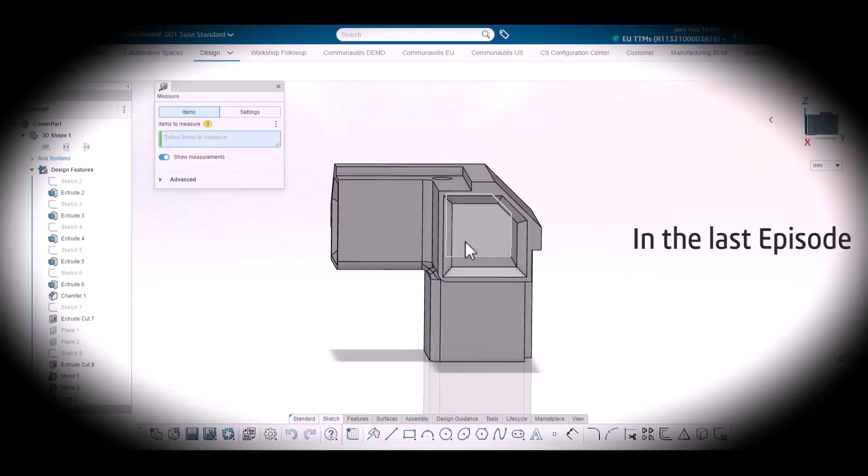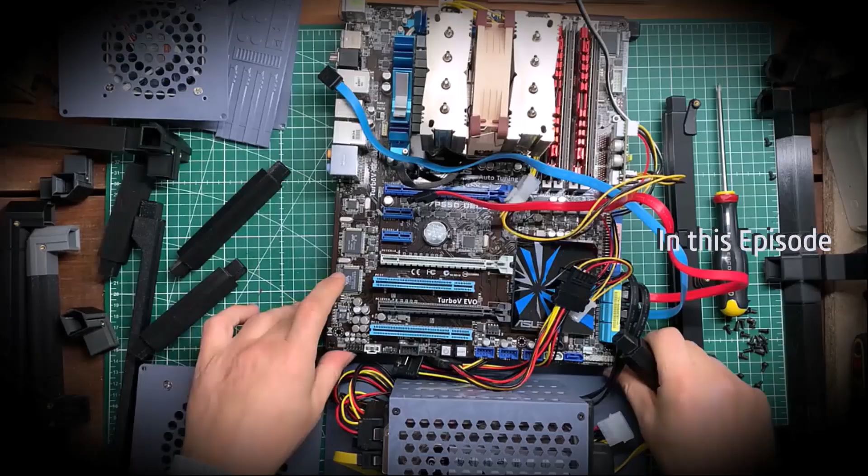In this series, we're transforming standard PC components into a fully functional network-attached storage with a 3D printed case. Don't worry if you've missed previous episodes, links are in the description below. In the last episode, we started solving some issues from the first NAS prototype, and there were some important ones. This episode is all about resolving the last issues, printing the revised components, and completing the assembly. I will also install the NAS operating system and a module to watch movies.

First, I assemble all the parts I changed in the last episode. We changed the whole structure, so I almost restart the assembly from scratch with motherboard bolted to back structure, and all corners and bars assembled. With the space I added in the last episode, they fit nicely together.

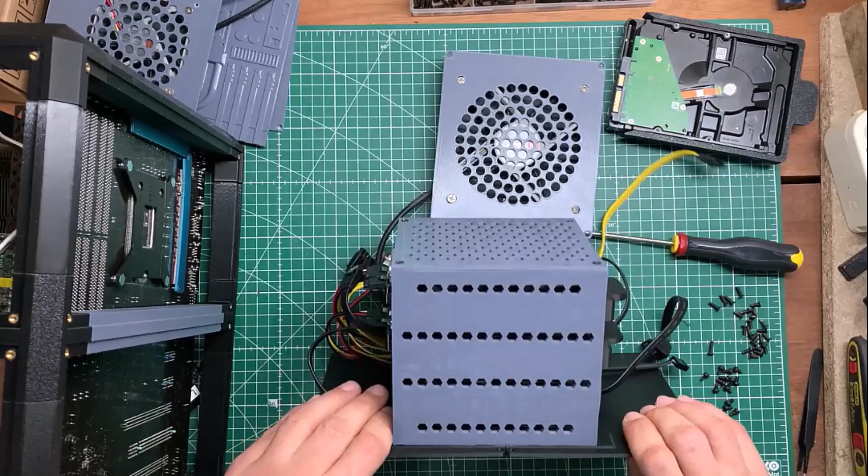When I take care of the hard drive box with the new stronger bottom plate, I also make sure cables are placed so they can be plugged correctly. This is not real cable management, but it is useful so the computer works. For example, the back fan cable needs to run under hard drives or the fan plug won't be accessible on the motherboard. I also plug hard drives on the motherboard because a NAS without hard drives is just a box with lights.

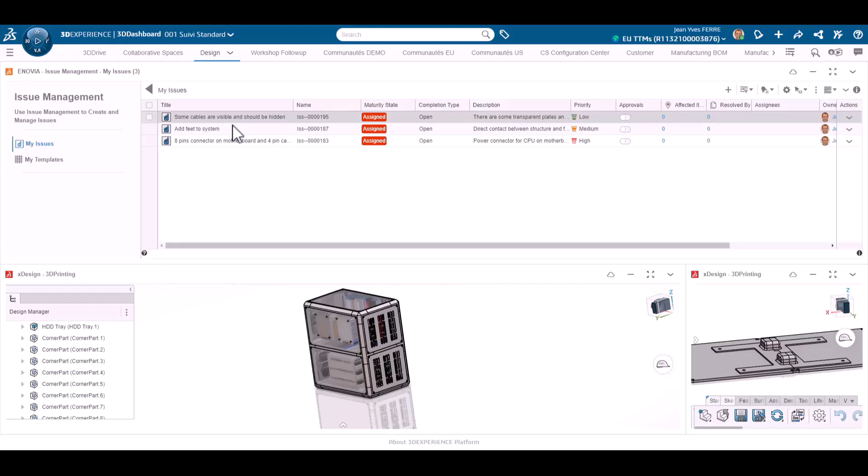Now it's time to tackle the last issues, and we will start with some pads under the NAS box. I don't want the structure to be damaged when I see the time it takes to remove everything, so I start with a simple extrusion with a draft angle of 20 degrees and add some fillets to remove sharp angles. And I create a mounting hole with a recess for the screw head. So far, only basic stuff.

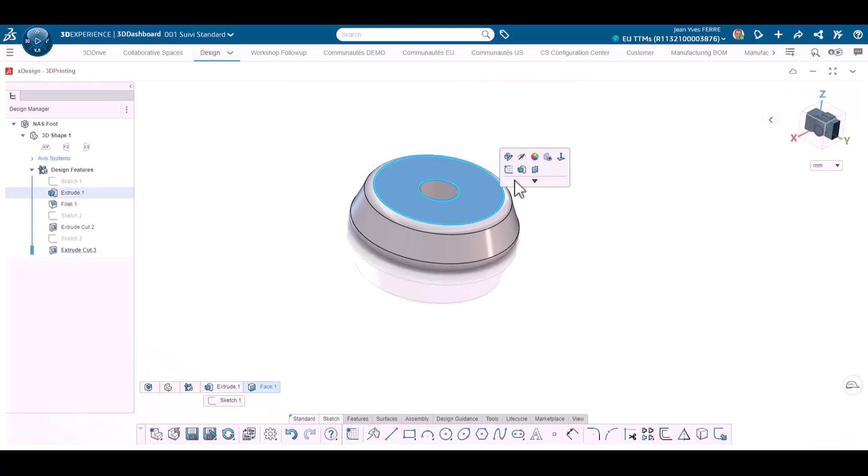Then I create a cut so the feet adapt to the bottom plate thickness. This way they will take the load on a larger surface, and this will increase stability of the whole assembly.

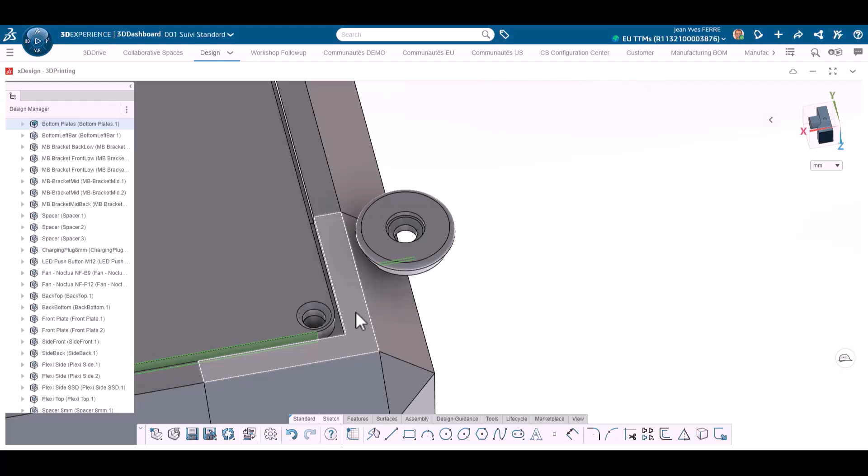When I mate the first foot, I leverage this mate with the foot using a feature called Copy with Mates, so I don't recreate everything, I just select new references for every new part. It saves a lot of clicks, flat bottom face, vertical orientation, and we are good to go. Once I've done that and got my 4 feet in place, I can mark the issue as resolved and move to the next one.

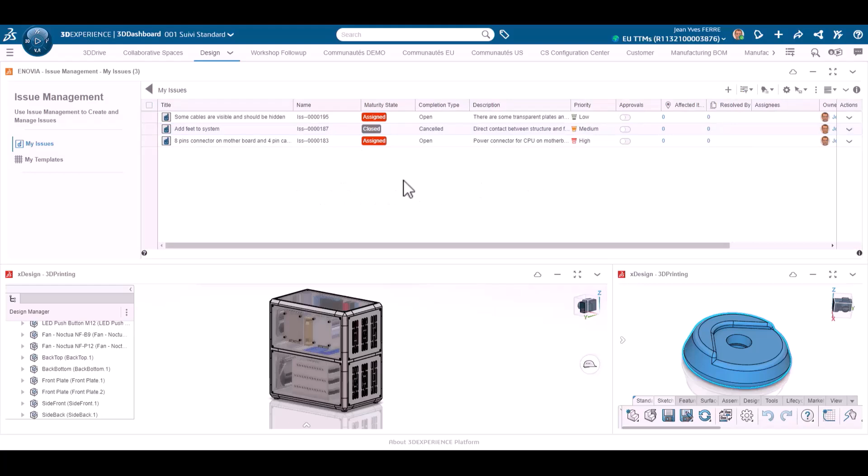For this next one, it will be quick. I need a power splitter. This will require only an order. This is key to power the motherboard correctly, but this is not in the CAD model.

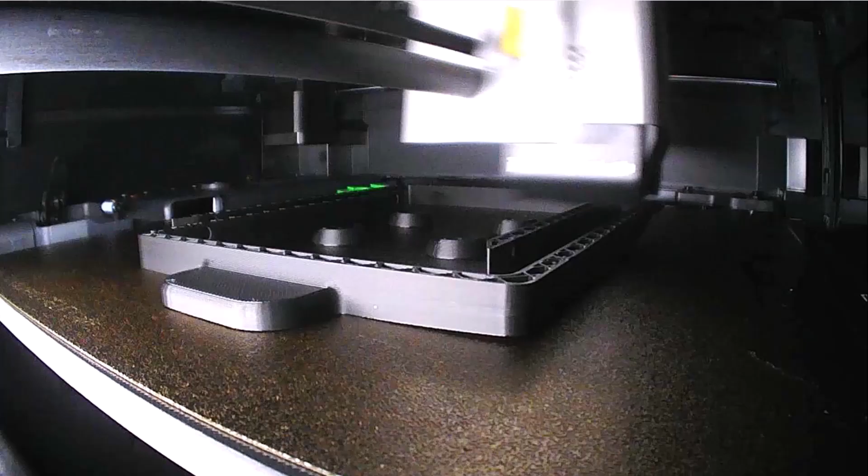Now it is printing time, and I print feet with one hard drive drawer to save time. Once printed, I just assemble feet with 1 screw each, and I also add new screws. I added these to reinforce the hard drive box. Now it won't move anymore. It is far better like that.

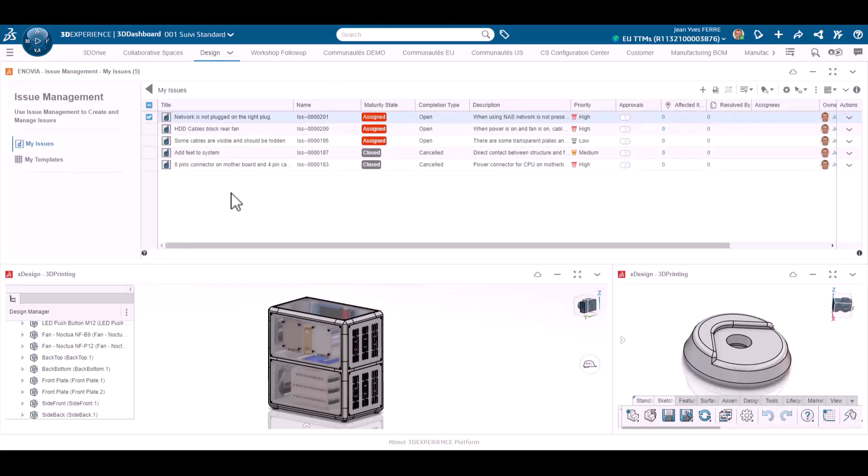Next issue is a little bit embarrassing, but it needs to be solved anyway. When I tested my first prototype, I realized the hole in the back plate was in front of a network plug that didn't work.

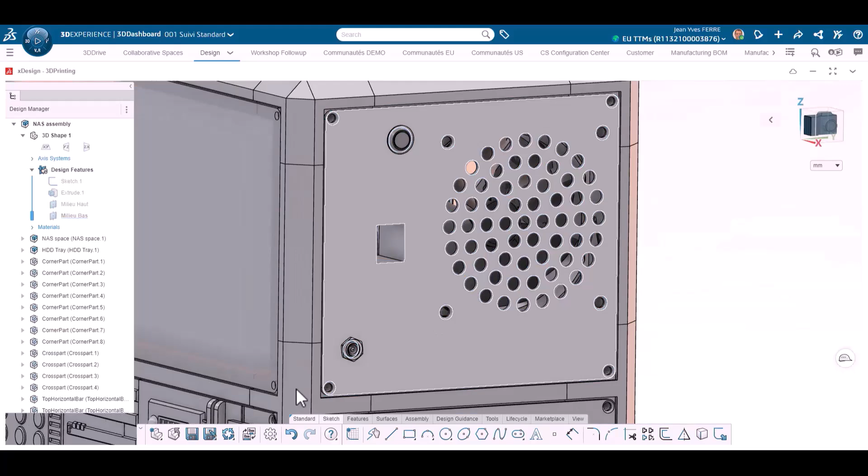So as it was, the NAS couldn't work. To solve that issue, we will see the power of parametric features, because I just need to open the sketch on the back plate where the network plug hole is drawn and change the dimension. And that's all. I check that the hole is in front of the plug, save everything, and mark the issue as solved in issue management.

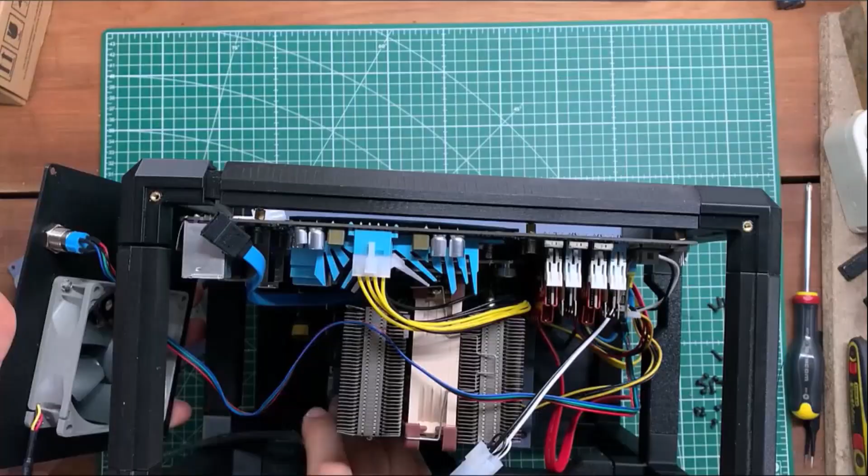Then I need to remove all cables attached to the back plate, like the power cable and the full switch assembly, remove the fan, and install everything on the new plate with the right network location. By the way, I don't have a 3D printing video for this part, and I'm sorry for that. Once everything is in place, I can mark the issue as solved and move to that last one.

Finally, the last issue I have to solve is a problem with hard drive cables that interfere with the back fan, causing a terrible noise. As noise is an important parameter for a NAS, I cannot leave this problem as it is. Cables could also prevent the fan from turning, and this is even more important.

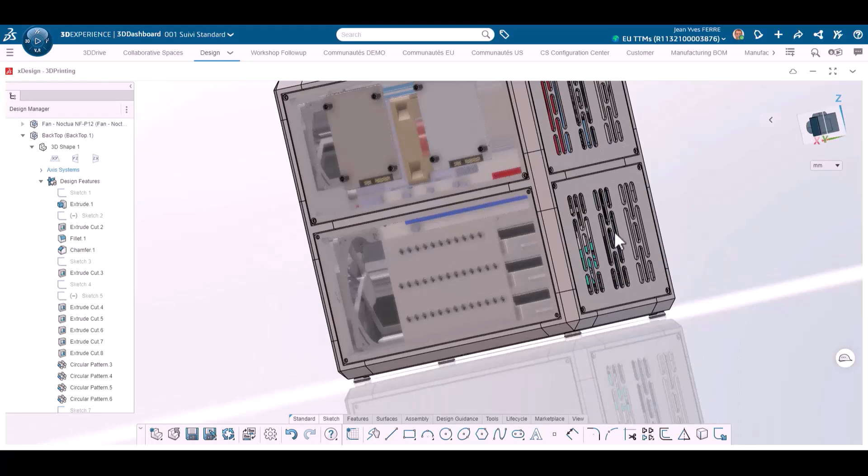I will add a perforated plate between fan and cable so they cannot block the fan anymore. So I take dimensions directly on the assembly, with dimensions between holes. Then I start a new part where I enter these dimensions to create the plate and mounting holes. You can see how xDesign knows I created some holes and proposes the same diameter.

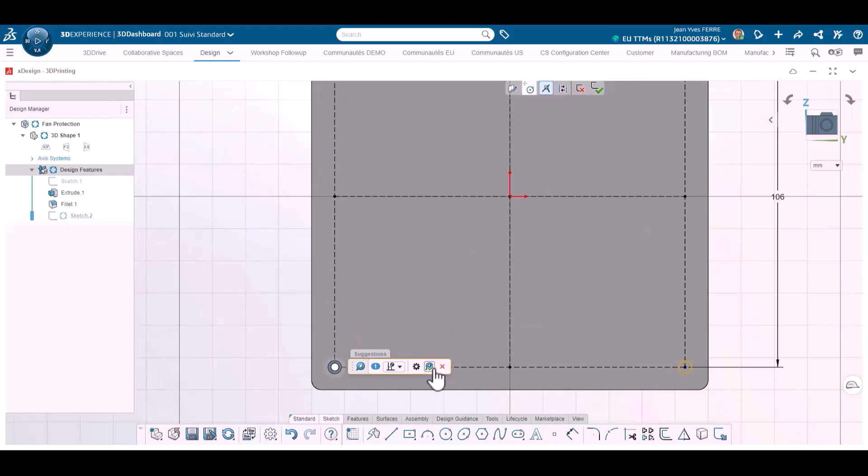I just need to accept or put another dimension in case the proposal is not the one I needed. xDesign proposes and you choose. I use the same method I used for the backplate to create holes, but I make sure they are big enough so airflow is sufficient. Then I mate this new plate with the back fan, and as you can see, it fits nicely.

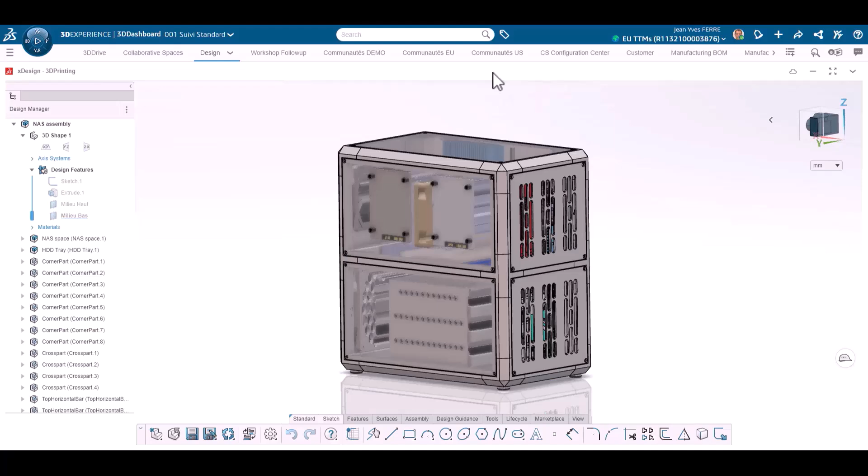I just need to mark the problem as solved, and we will try to fix the last one during the assembly phase, as it shows cables need to be hidden. I will do it anytime cables are long enough to be hidden.

For the last time in this assembly, this is a quick printing time. Now I can fix the plate directly on the fan where some holes were available, and I finish with putting the fan in place.

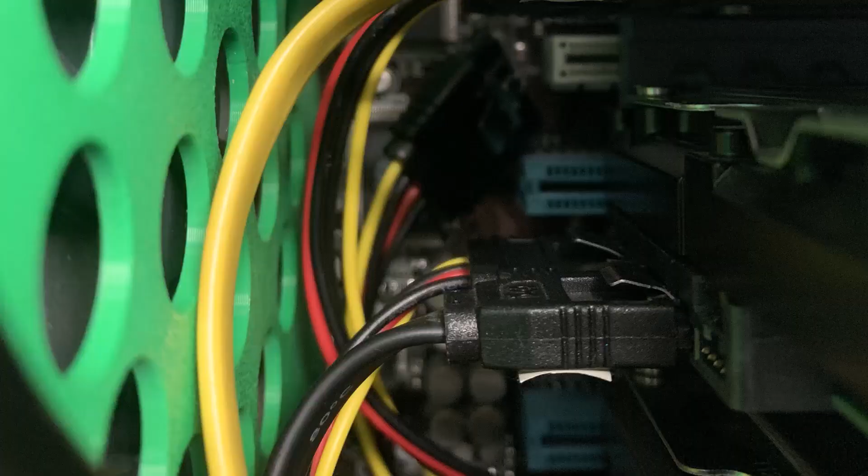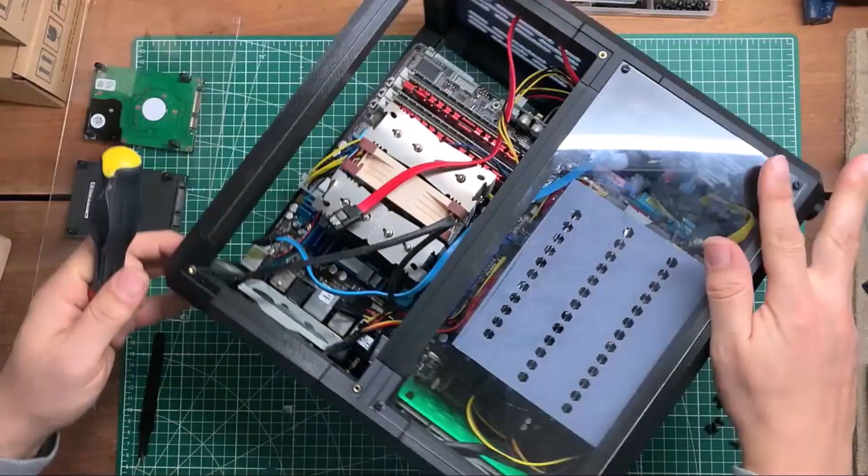As you can see, now cables cannot interfere with the fan. I finished the assembly with last transparent plates, including the one with both SSDs, once all cables are correctly placed. They are still visible, but I won't be able to do better with this length of cables.

And now finally the assembly is finished, but will it start? Yes, it's on. So I need to install a NAS operating system. I chose TrueNAS, but this is only my choice. You can install whichever system you are more familiar with.

I have to define what each drive is meant for. I will create a storage pool with my 3 hard drives and assign a cache SSD, which is needed for a NAS. Then I install Jellyfin to create a video server, so I have access to the description and content of my movies. Of course, please use this only with movies you own.

So I can now consider this project as finished, finally.